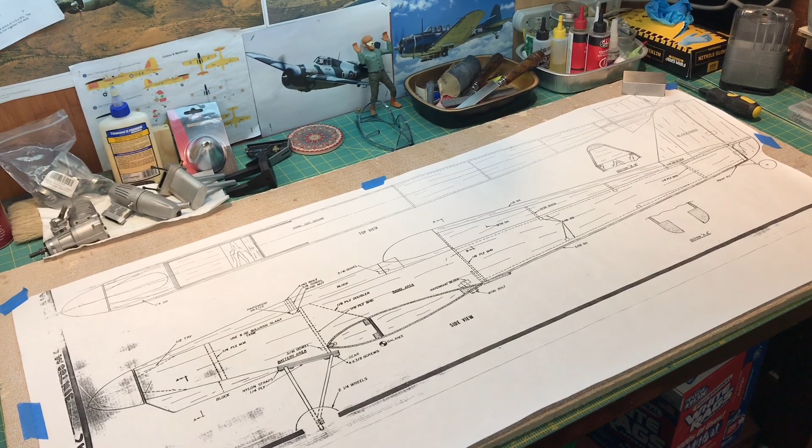So as you can see here, I have the plans laid out for the fuselage, and that's going to be the next major step of this build. If you've been watching my channel, you'll know I've spent a lot of time building the wing to this point, and there's a lot of videos on that. So it's nice to move on to another part of the plane. After a while building a certain part, I find it refreshing to move on to something new. So I'm really looking forward to starting the fuselage, and that's what I'm going to start doing today.

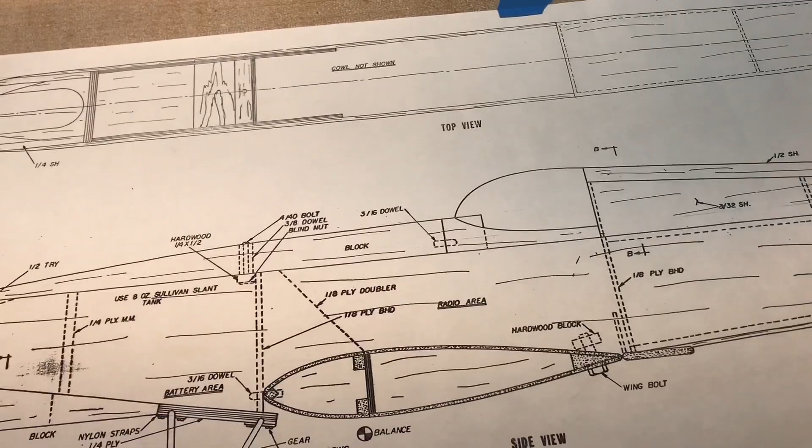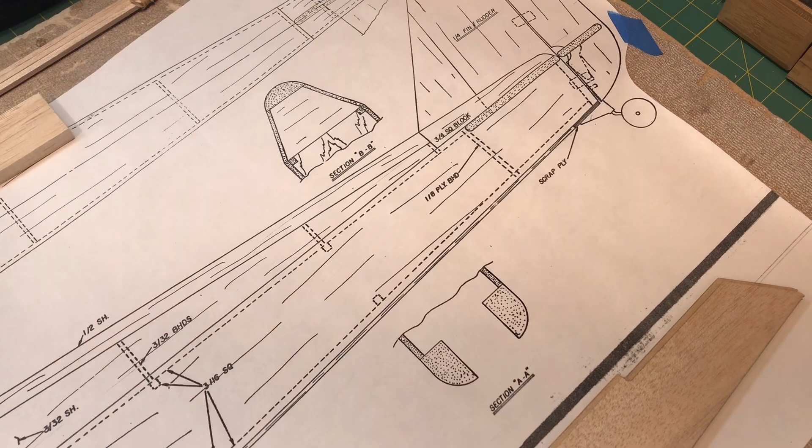Alright, so let's go ahead and talk about some of the design features or construction features of the fuselage. To start with, the sides of the fuselage are going to be a very long plank of balsa that goes along the entire length of the fuselage, and it's going to form sort of a box structure.

And here it is looking down on top of it. Not too exciting. Obviously it tapers down as it gets toward the tail section. And then the front section, there's going to be these plywood doublers to help strengthen up this area of the fuselage. That's shown right here on the plans.

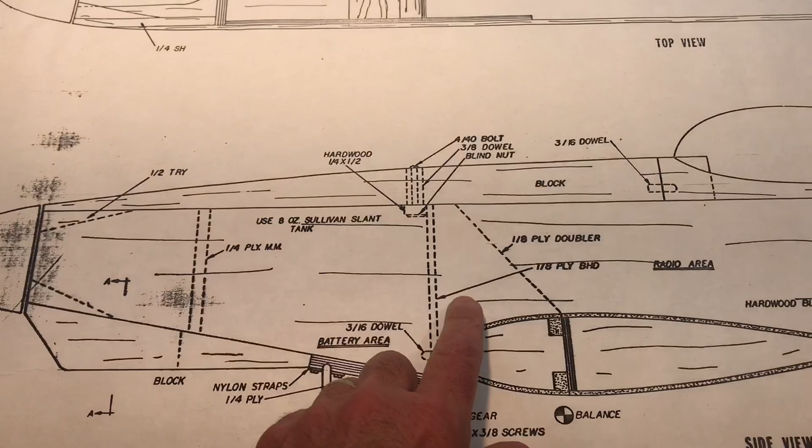So here's this piece here is going to set on here like this. And then the doubler is going to go right there, on top. This is kind of typical construction.

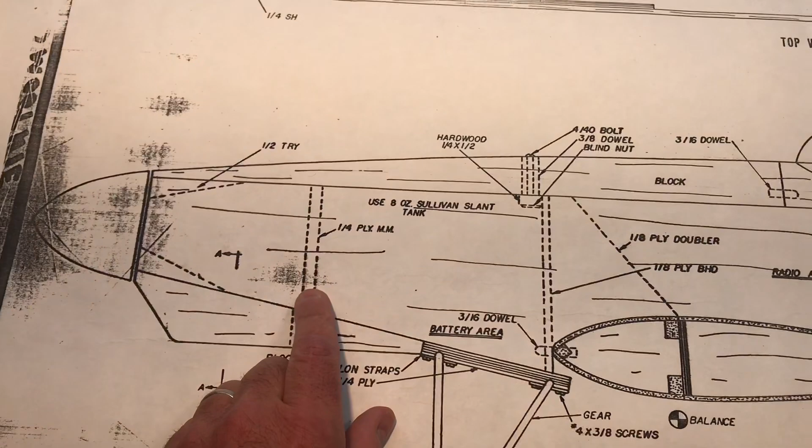And then there's going to be a series of these bulkheads. There's going to be the firewall, which is a quarter inch piece of plywood. What do I do with that? Here it is, there is the firewall.

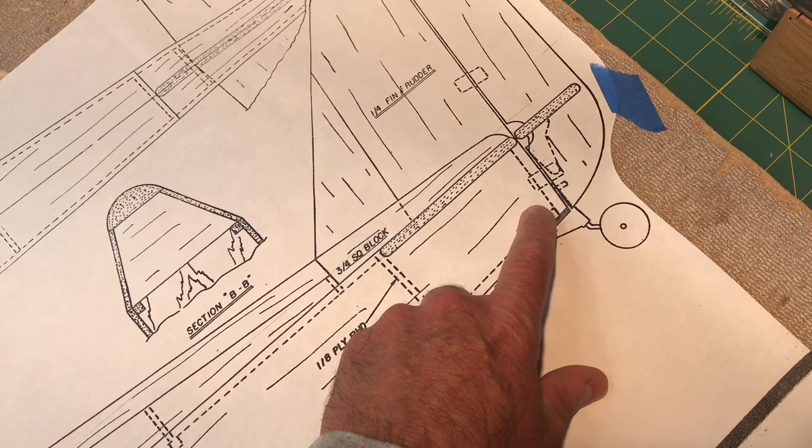And then there's going to be a series of these bulkheads that go in - there's going to be one here, one over here, one back here. And then in the tail section, there's just going to be a small piece, probably like a piece of square stock, to kind of bring it all together in the tail.

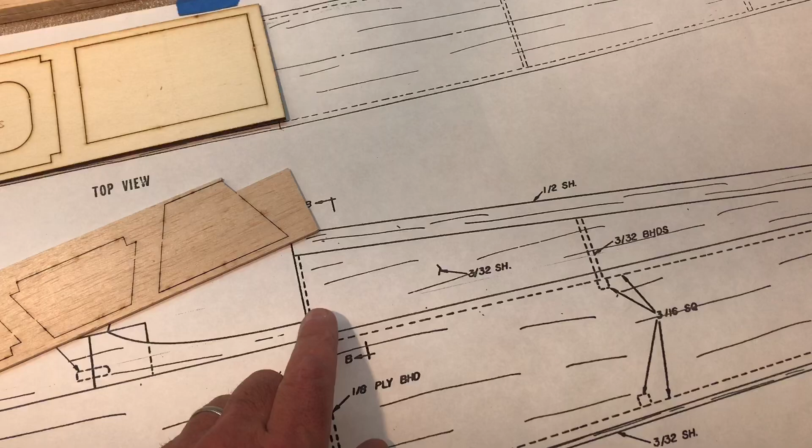And then up on top, there's going to be this turtle deck structure. Here's a cross section of that. And that's basically going to be formed by these smaller profiles - they're not really bulkheads, but they're just sort of placed right here, here, here, and here toward the back. And then on top of that is going to be this piece of block balsa.

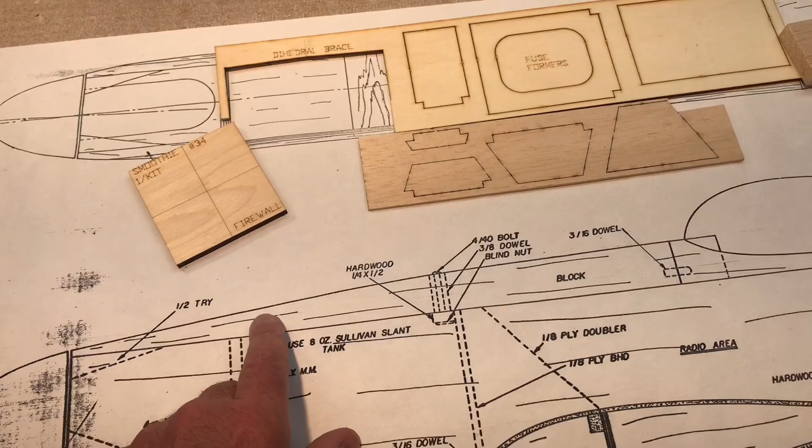So this is going to have to be shaped to this kind of shape you see here. Here's the piece of balsa up on top. In the front here, there's going to be a hatch formed out of this block of balsa, which will have to be shaped - this guy right here. And then it's going to tie into the area where the cockpit is, and that's this guy right here.

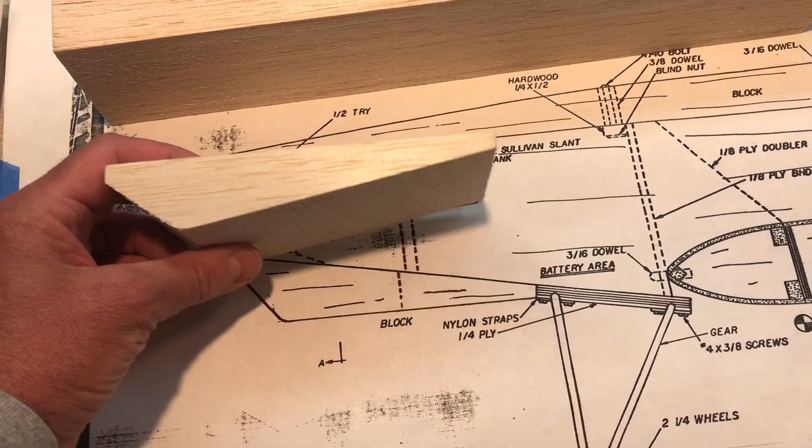So you can see there's going to be a lot of shaping and cutting like we did on the wing. And then on the bottom, the front here is going to be this piece, which is going to form this lower portion of the front of the fuselage, sort of like that cowl area.

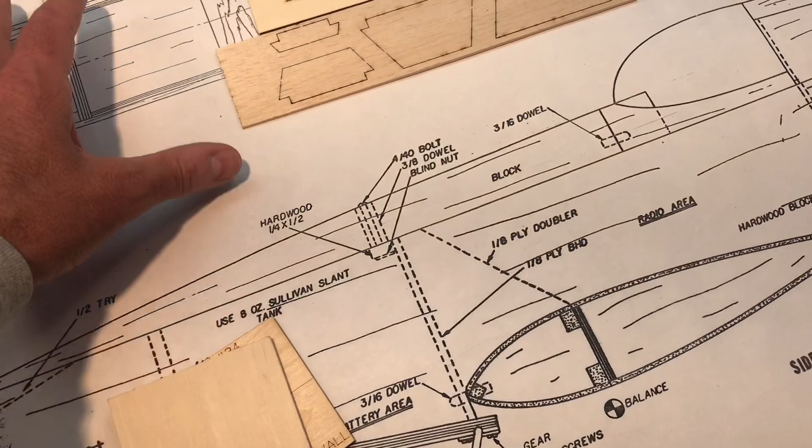All right, so let me get this stuff out of the way here. And here's the firewall, I'm going to come back to that. This section here is going to be where the landing gear ties into. This is the piece of landing gear stock, which is a piece of plywood, is going to go right there.

And then looking down on sort of up in the front area of the airplane, there's going to be another more doublers. And then there's going to be some triangular stock to kind of bring this all together, because this is going to have to get shaped and brought down. So it has to be built up so that you can do that.

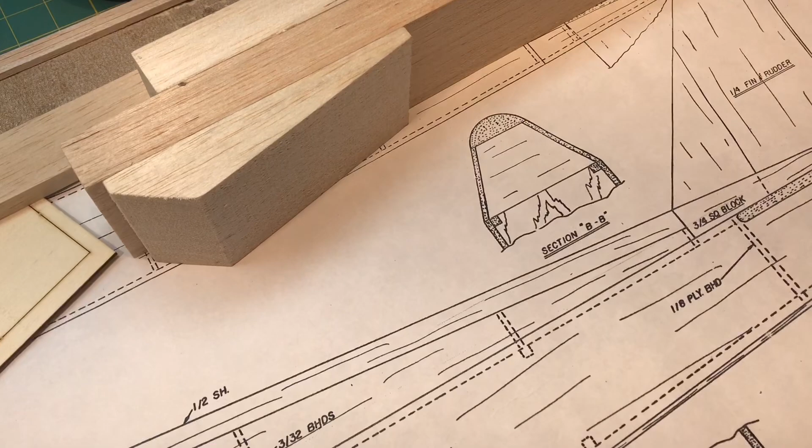All right, again, so here's the cross section through sort of this turtle deck area behind the canopy. And here's the cross section of the front lower section in the front portion of the airplane. And the reason this is open is because, I think, just to make room for the engine - and we'll talk about that in a second.

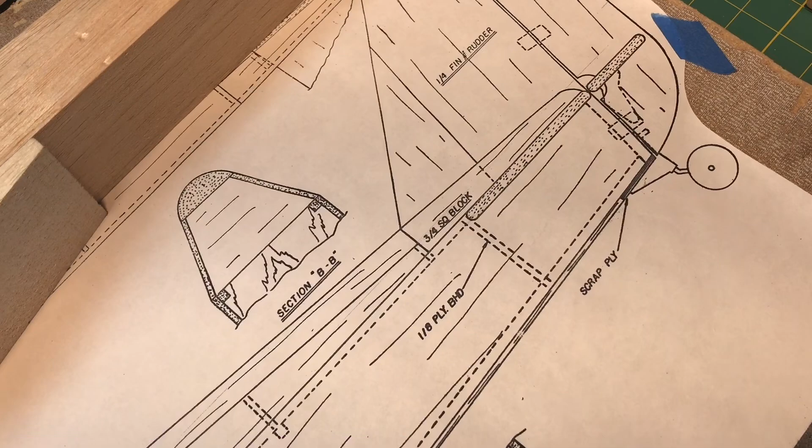And I think that's kind of basically it for the basic pieces and structure. There are going to be some cross members that go - these are like, what are these, 3/16 inch square cross pieces.

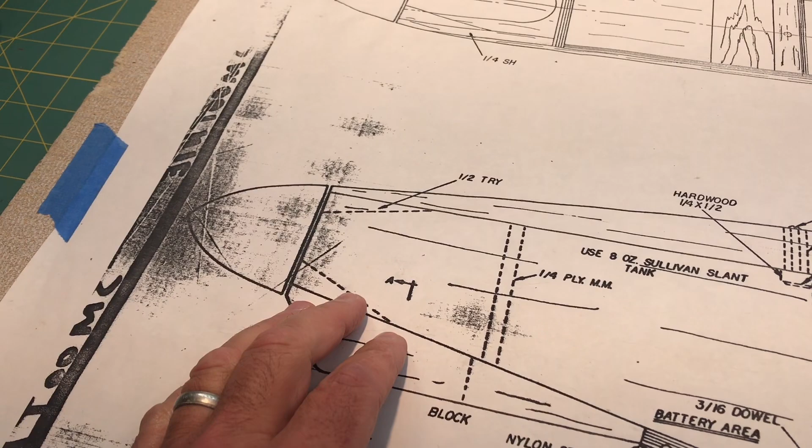All right, so one thing I want to look at is this firewall location. In the instructions, they tell you that the firewall is located here and it's up against the doubler. Let me pull one of the doublers out of here if I can pop it out.

Right, hold on a second. Let me pop that out with an X-Acto blade. All right, I'm holding my camera so I can only have one hand, so I got to do that off camera. So here's the plywood doubler.

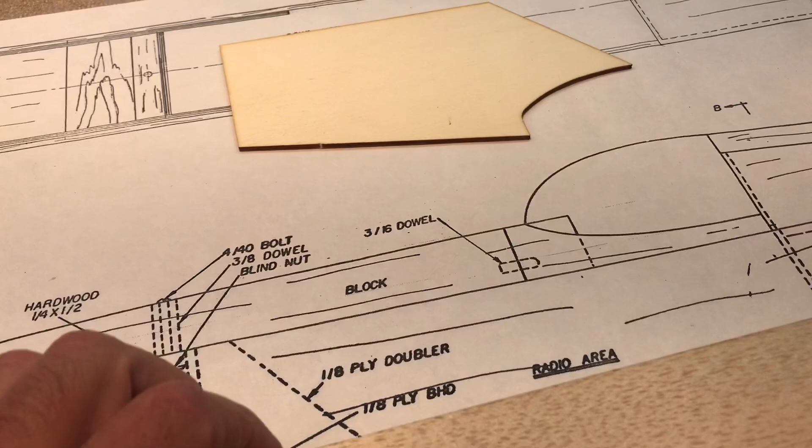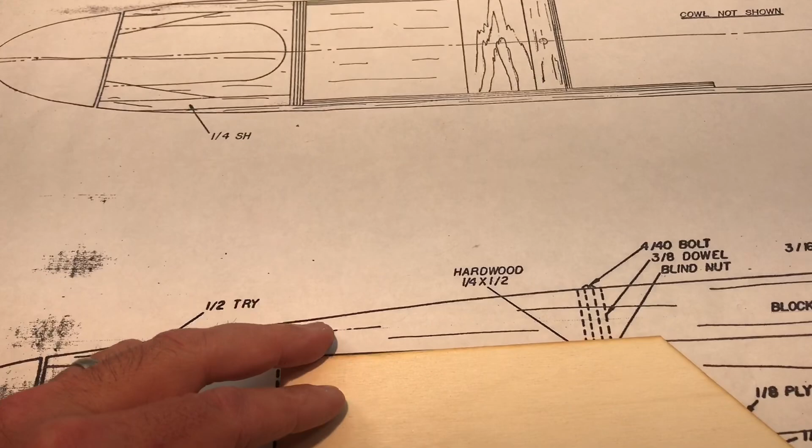So this piece of balsa is going to go down on here like this, and then the plywood doubler is going to go like that right there. Now let me move this out of the way and bring our doubler back up on here. So the doubler is going to go again like right here, just right about there.

And what you'll notice is that the firewall is basically right here. So the doubler kind of butts up against the firewall, or vice versa. The firewall butts up against the doubler like that.

So the thing is, the location of the firewall may change depending on your engine size, and this is in the instructions. Basically, based on your engine size, you may have to move the firewall forward or back a little bit so that it fits in the right location relative to the spinner and to the end of this cowl section right here.

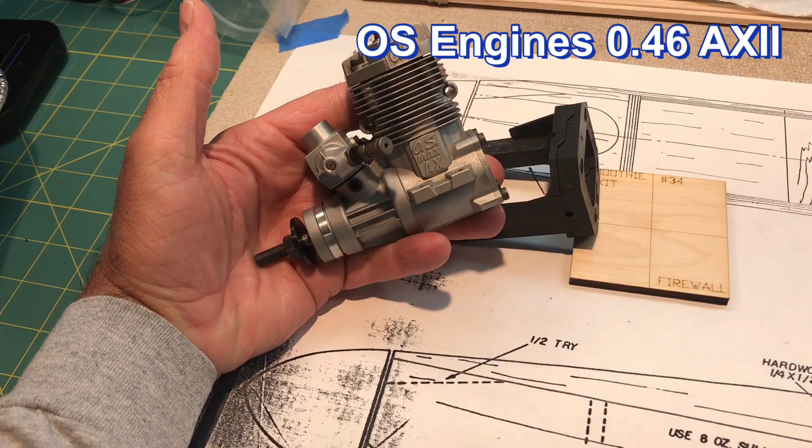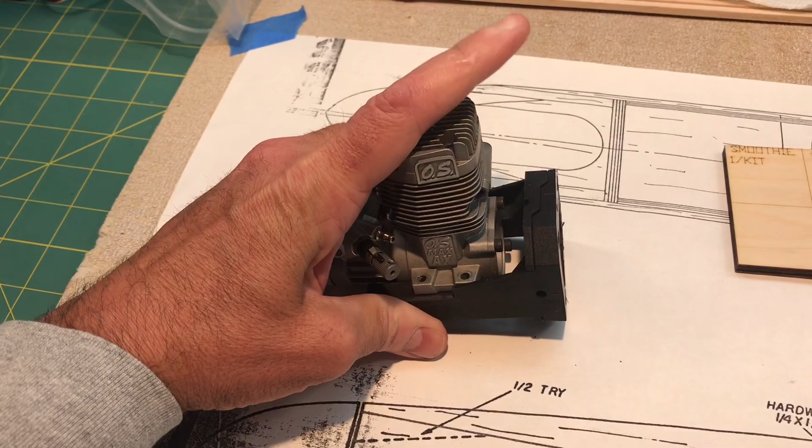All right, so let me grab my engine. I'm going to be using this OS Max 46 AX2, and I have this engine mount for it, which is going to be right about here, and it's going to be mounted probably somewhere in the middle of the engine mount so that I have some room for the hose or the fuel lines to come through if I need to bring them through the middle, and I need some space also for the mounting bolts for the engine mount itself.

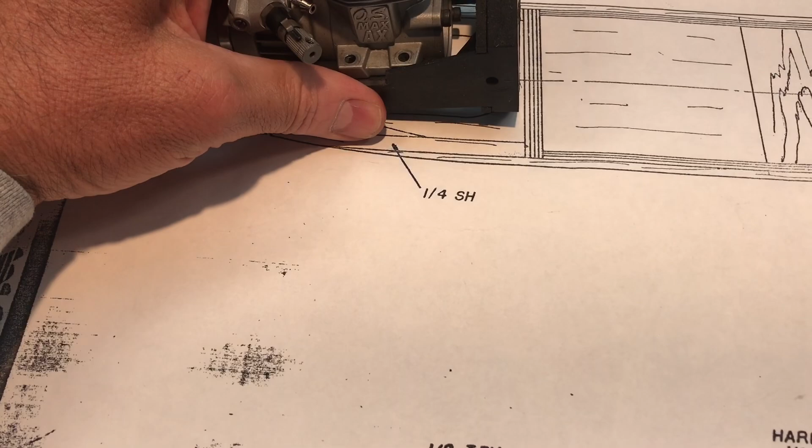So if I put this down sort of where the firewall is going to be located, let me do it on this one up here. Per the plans, it would be right about here somewhere. And what you'll see is that the engine sticks out really far, like almost an inch or so from the front.

What I have to do, obviously, is move the firewall back a little bit. So usually you want sort of like the back plate of the spinner or the front portion of this part of the engine probably sticking out about 1/8 of an inch or so, 3/16, 1/8 of an inch gap between the front of the cowl and then the back of the spinner.

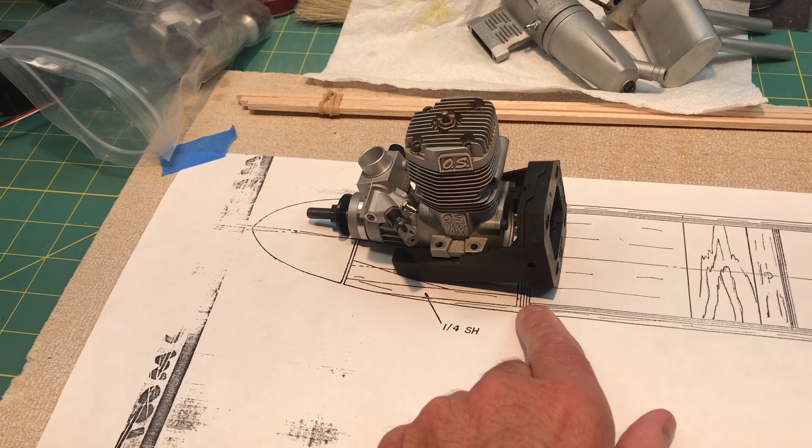So in order to do that, I'll have to put the engine back somewhere right about there, and I'll have to relocate the firewall back a little bit. Again, this is in the instructions, so it's nothing special.

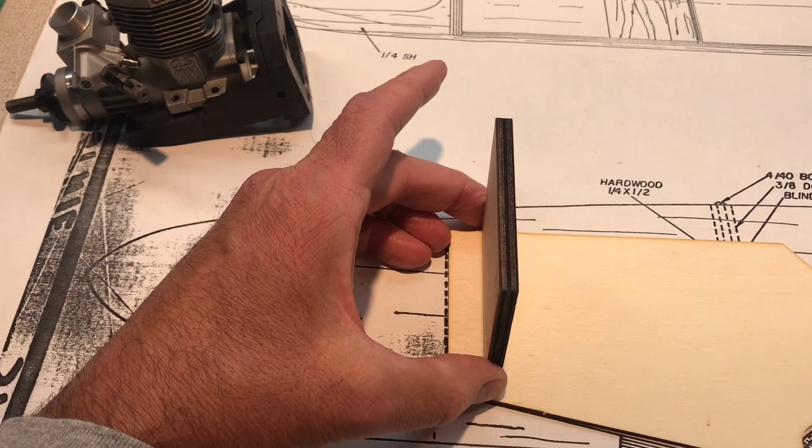So what's going to have to happen is I'm going to have to trim this doubler back so that, obviously, the firewall will come back a little bit like this. So I'll have to trim the doubler back so it matches, and we'll measure all that out later, but that's basically the general idea.

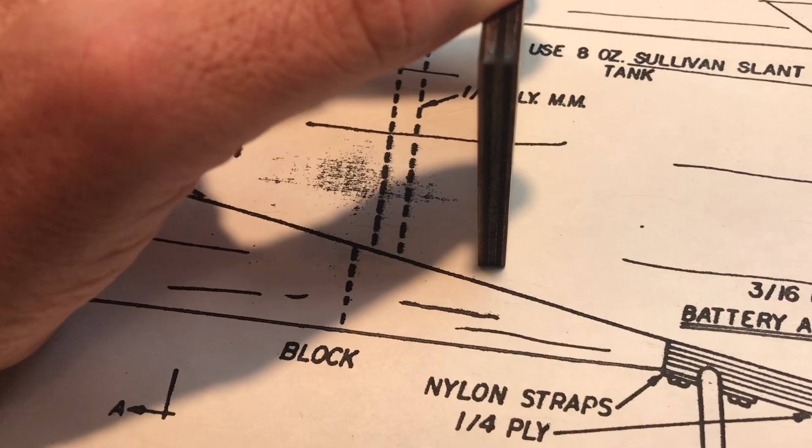All right, so a little bit of an issue is that if I put the firewall where it was supposed to go per the instructions, and I move it back about 1/2 inch or so, right about there, you'll see that there's going to be a gap between the bottom of the firewall and the bottom of the fuselage.

So the way I'm going to deal with that, which makes sense, is I'm going to go ahead and cut another firewall out. And I have this piece of plywood. This is birch plywood, which is the same 1/4 inch thickness. So I'll end up just cutting a piece a little bit longer so I can get the proper size for the firewall.

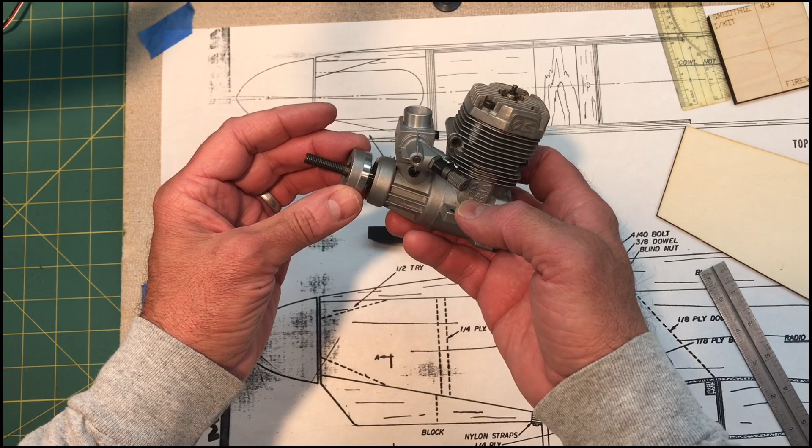All right, so I'm going to go ahead and make the measurements now for the location of the engine mount. And I took off the retaining nut, the prop nut, and the washer so that I have the end of the engine here kind of exposed.

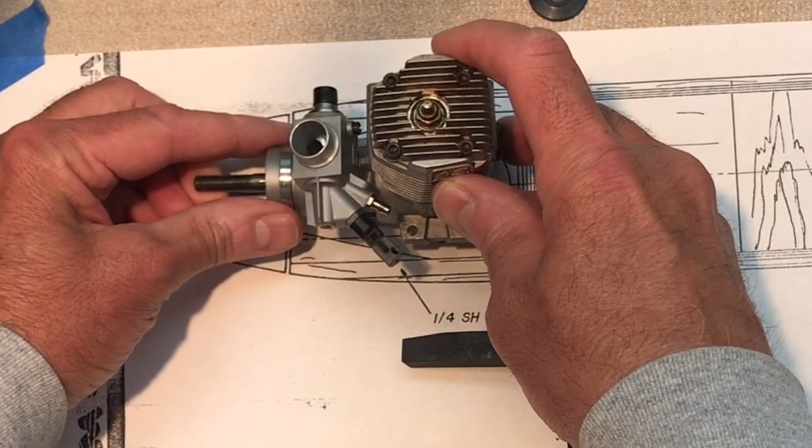So the engine is going to go somewhere about right there. Now I haven't decided if I'm going to mount the engine sideways or inverted. I'm probably going to go inverted with the engine. It doesn't really matter at this point how I do it, because the location of the engine is going to be the same no matter what orientation it is.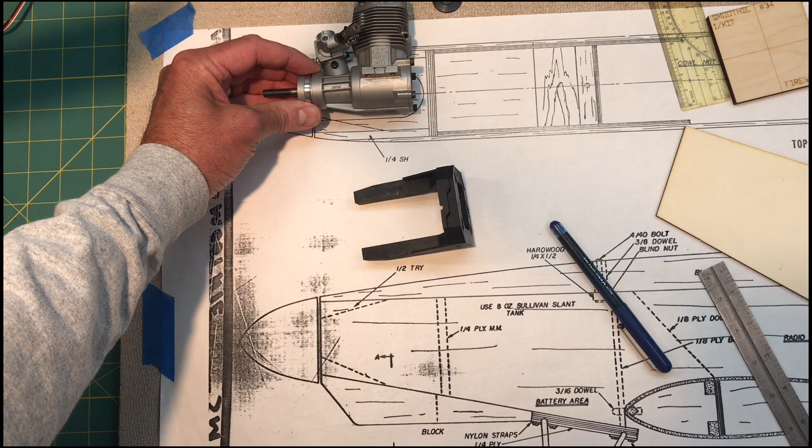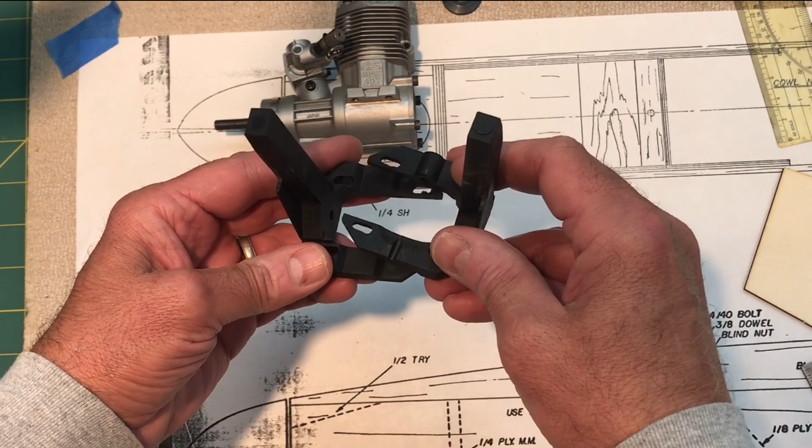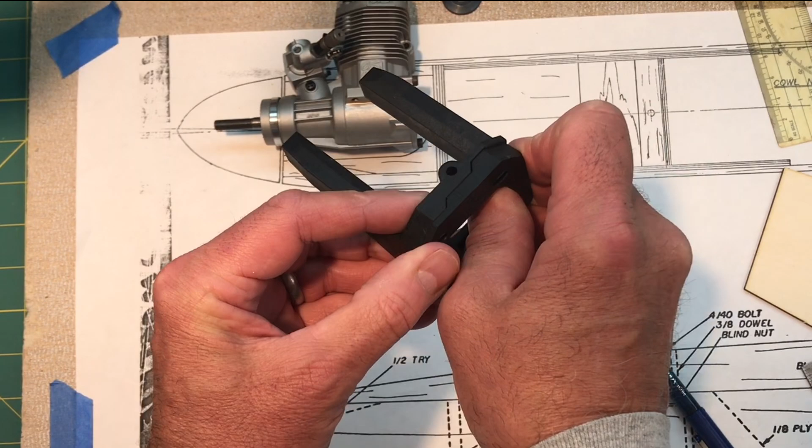So this is going to go about somewhere like right about here. Okay, this is a Great Plains engine mount. It actually comes in 2 pieces, and they slide together, making an adjustment because it goes from a 40 to a 60 size engine, so it can come out pretty wide, but it fits together nicely.

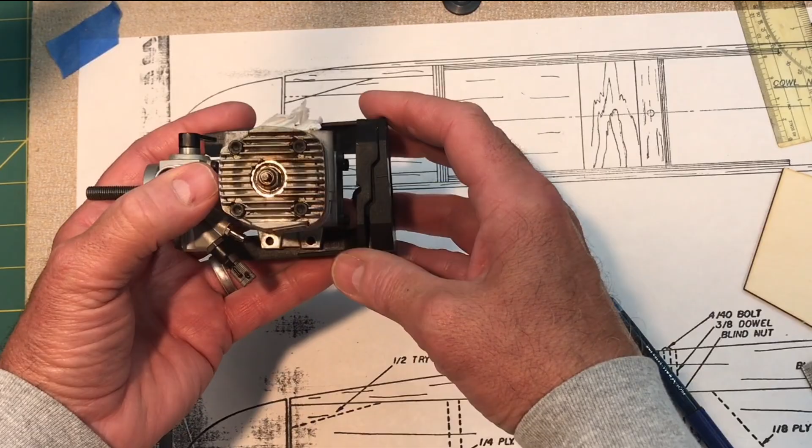Let me get this engine on here like this. So it'll be somewhere like that. I'm going to put the engine about midway on this mounting rail. There's an angle here that gets in the way, so I can't push it all the way back.

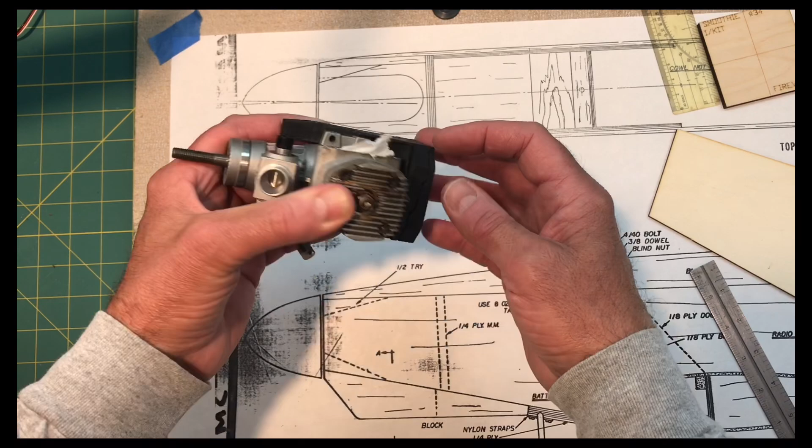Plus I don't want it all the way back anyhow because I need to make room for the mounting bolts, and also for the fuel lines, the throttle hookup will probably come right over here. So I'm going to put it right here in the middle, and use that as my baseline for my measurements. By being in the middle like this, I can make final adjustments later if I have to bring it forward or back a little bit.

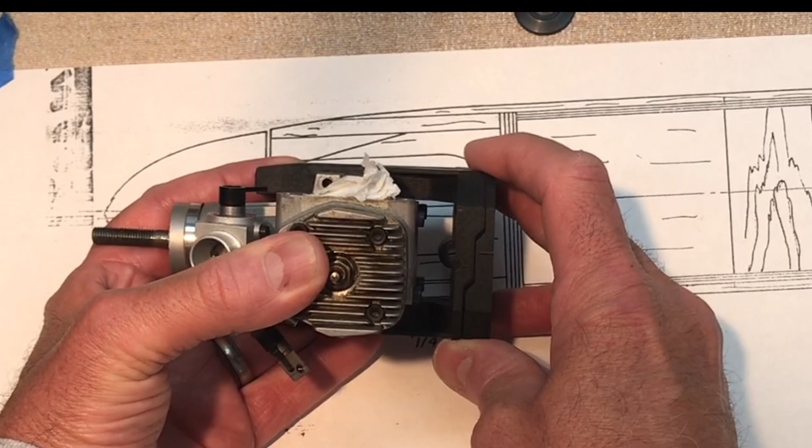I'm going to go ahead and start sort of in the middle, and I'm not going to measure it exactly, just somewhere like right about there. I'm going to try to push this a little bit forward here, and try to clamp this on here if I can get it to hold. I'm not sure if it will or not, or how well it will work.

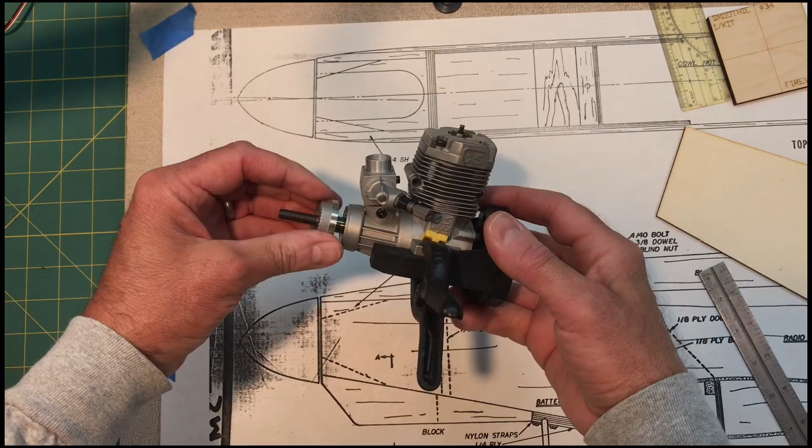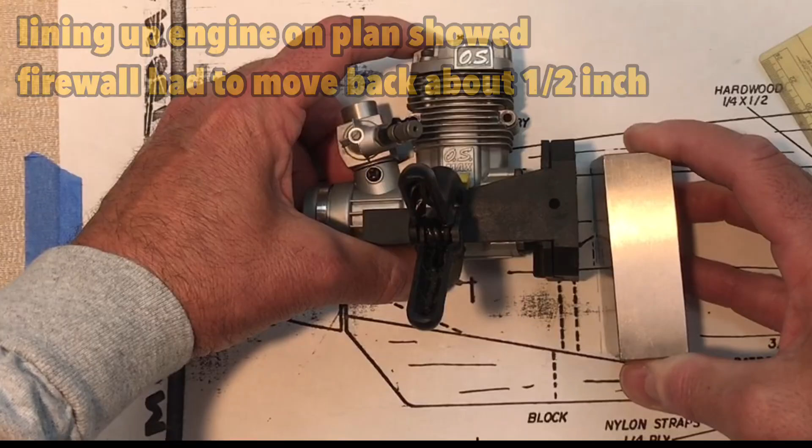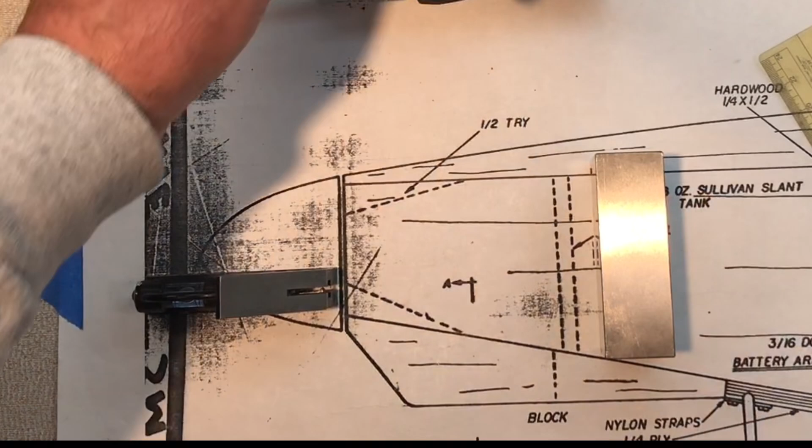All right, so there's my new firewall location. Pretend that's my firewall. Go right there. Looks pretty good. Let me grab this guy right here. All right, so that'll give me the room I need for the engine mount.

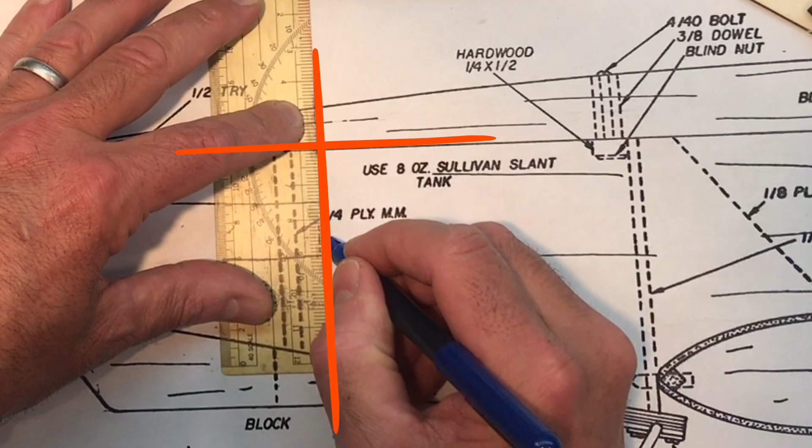All right, I'm going to check it with my protractor here, and I'm going to bring my line.

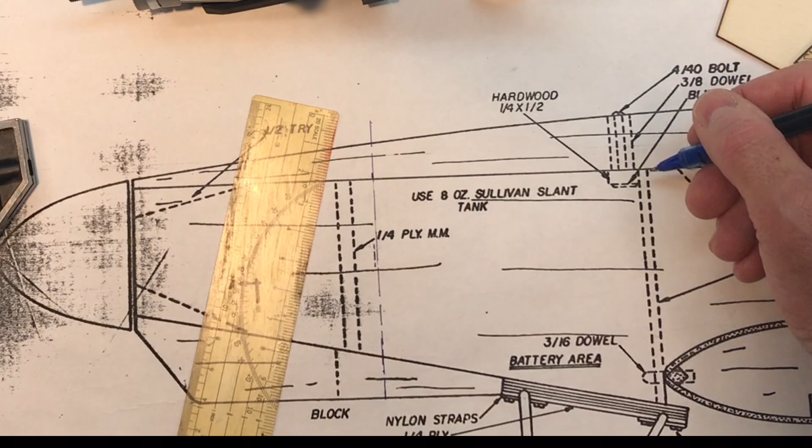The reason I went beyond here is because, as we'll see with the other bulkheads, I have to transfer these lines beyond the fuselage, because I'm going to mark those locations with the bulkheads on that large balsa plank. That'll be in an upcoming step.

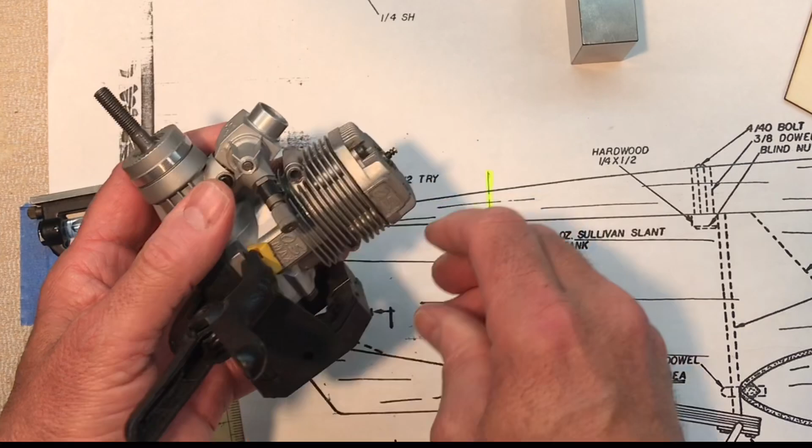Okay, well that's that. That was easy enough. Let me put these back on here. I don't want to lose these.

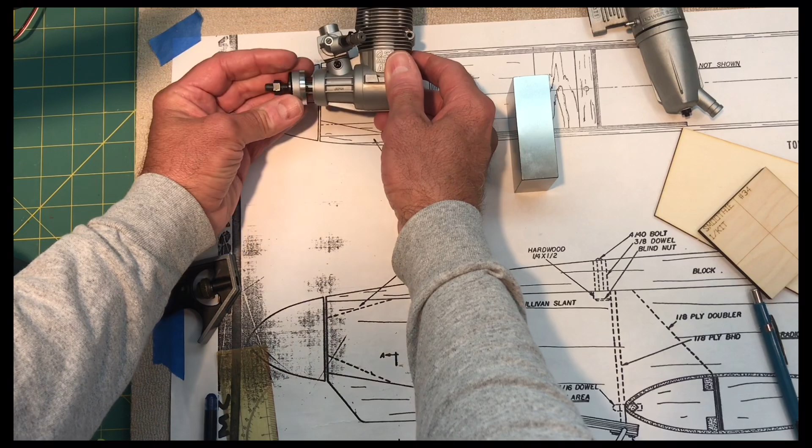Okay, as I mentioned, this is an OS Max 0.46 AXII. Looks like if I go upside down, like I mentioned, I'll be using this muffler out here like that. I was considering going sideways, if I went sideways, I could use the original muffler also, but I also had this Pitts muffler, which actually looks really cool, because then it would be sticking out of the bottom like that.

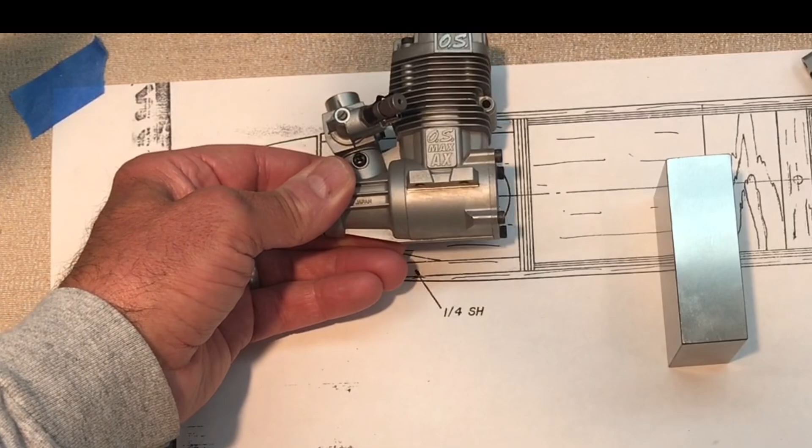So I just haven't decided yet. The problem with going sideways is that the head of the engine is going to stick about that far out of the side of the plane, and I don't know if I want to see that. So I still have to decide, but that's one way or the other. I am leaning toward mounting it upside down, or inverted.

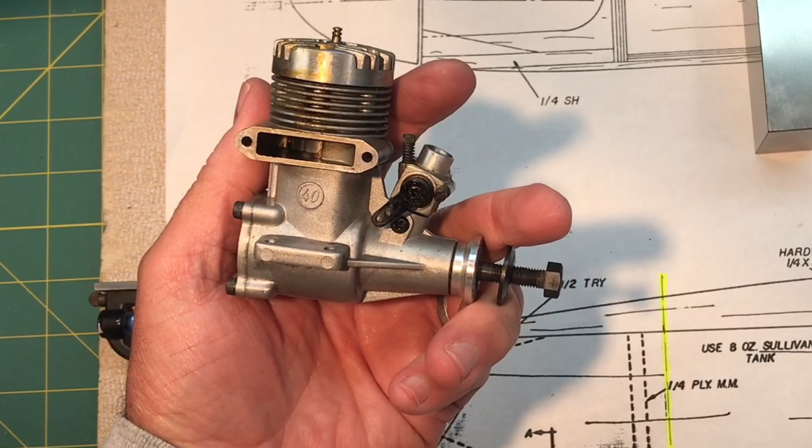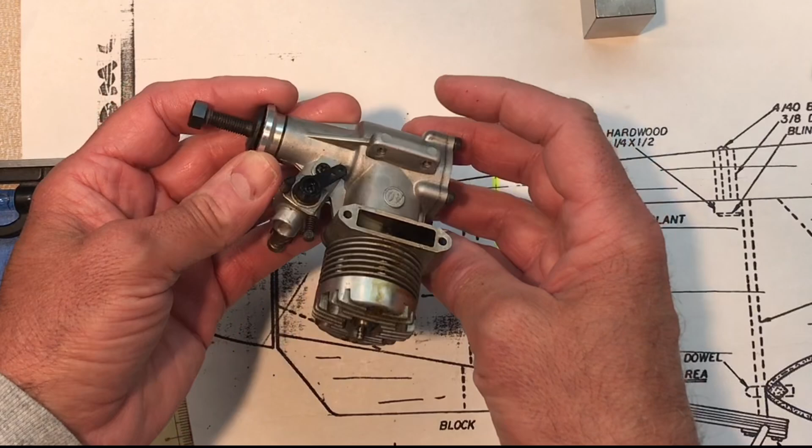All right, the other thing I have is just for show, this old OS FP 40. Now this plane, the lower end of the engine would be a 40 class, like this guy right here. You can see that if I used this old FP on here, I would have probably plenty of room without having to modify the firewall. But I think this engine is not very powerful. I mean it's a good engine, it's an FP engine, it's nice, but I think I need something a little beefier for this plane.

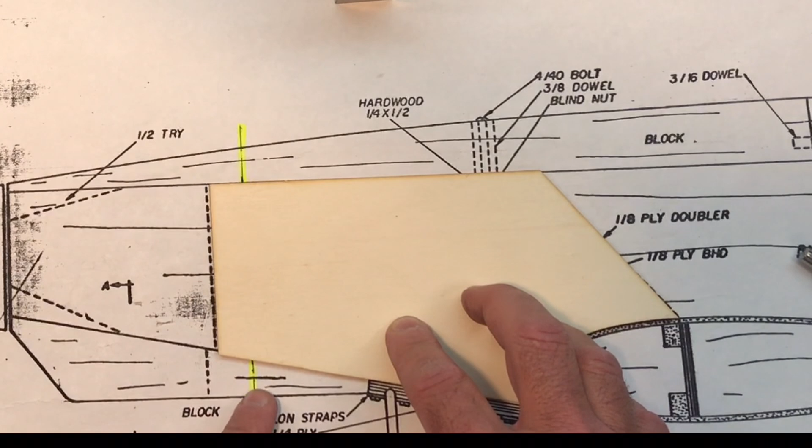Okay, so I'm not there yet, but eventually this doubler, and the plywood plank that goes along the side will be right here, and I'll have to transfer this line onto here so I can cut this to make room for the firewall that's going to be moved back.

All right, the other thing I have is the spinner that I got for this thing. Oh, that's pretty nice. Huh, there's no... that's not good. Didn't come with a little nut. Oh well, I think I have one of those.

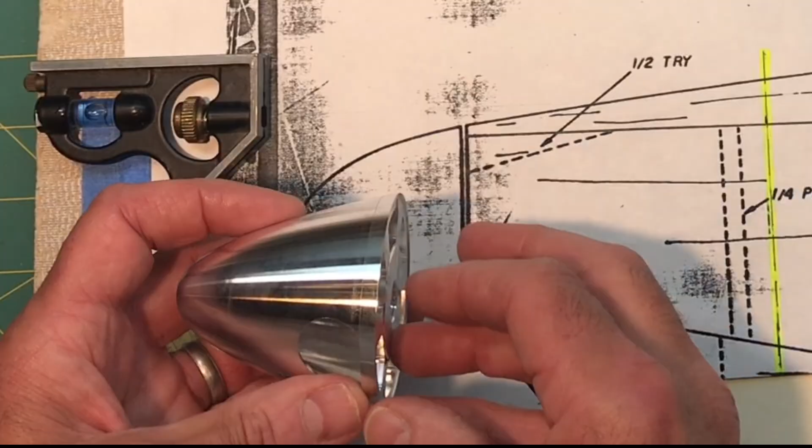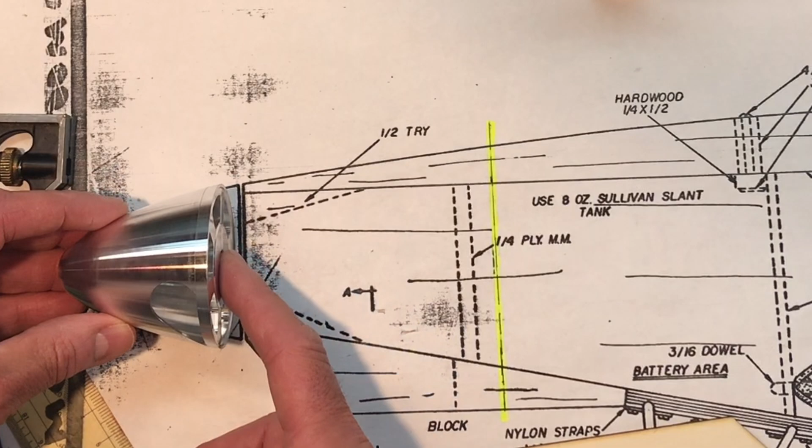That's going to go right here, like that. So what's going to happen as you construct this, once you get all these blocks on the front of the fuselage, I'm going to have to mount the engine and then mount it with the spinner so that I can make these transitions and carve this block down to match the spinner geometry. But that's a little ways off. Anyhow, that's really nice.

Right, now that I have the firewall located, I have to extend, as I mentioned, these bulkhead lines out beyond the fuselage side so I can mark them carefully.

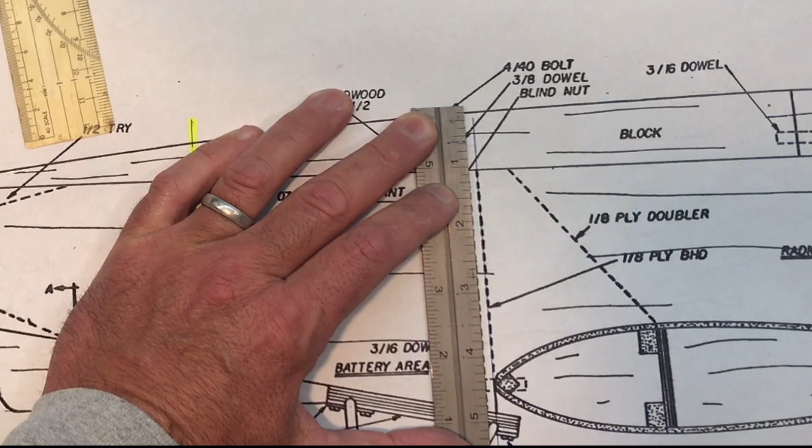There you are. Okay, all right, and I'll do the same for these two last ones. This one.

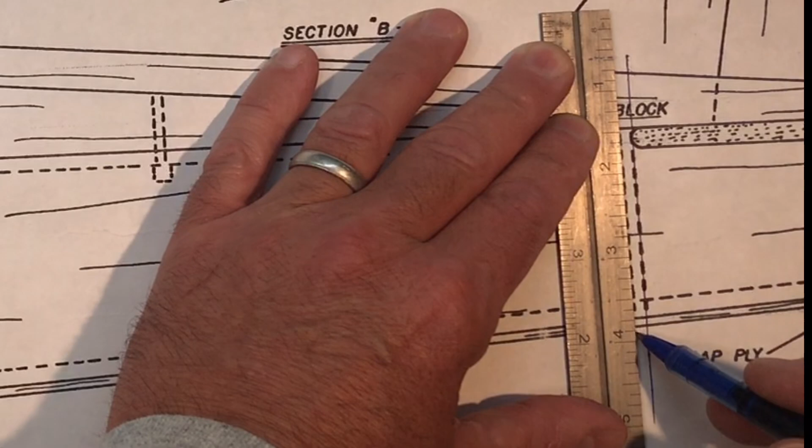Now what I have to do is put these balsa planks down over the plan. I'm going to put them on top of each other because I need to mark them both in the same spot, so I carefully want to make sure I get them lined up against each other in the right location, somewhere like that.

Actually, I'm going to start by taping them together. I'm going to get them close.

Really, probably the most important spot is going to be right here where the wing's going to go, and make sure that's lined up, because the edges I can trim if I had to, but these look pretty good right there.

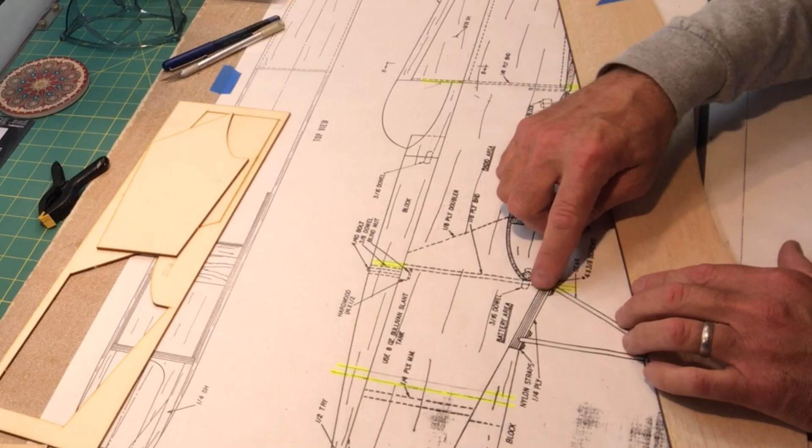One thing the instructions tell you is that the plans may be a little stretched or a little bit off, probably due to printing, so you have to be a little careful. I think what I'm going to do is make sure the wing root here is in the right location, because this is going to be a control point with this bulkhead here, and then with this one back in here. Then I can always trim off the edges or the ends if I need to, but I don't want to mess with the wing root area.

So this is going to go right about there. It may be hard to see, but this actually sticks over about a quarter of an inch on the front here. And then the back piece is actually angled weird, it kind of goes off on a triangle, or like an angle like this. But the back of this is actually going like this, the tail section is actually like that.

So they do mention you have to do some trimming. Obviously this kit has changed over the years a little bit, and the pieces you're getting in the box, I've found, don't always exactly match the pieces on the plan or in the instructions. So there are a few little minor things. None of it's a big deal, but if you're not prepared for that, it may confuse you a little bit. So anyhow, just take your time.

Okay, what I'm going to do now is pin this down onto the building board. Now I don't have my wax paper down here yet, I'll do that later. I'm going to get this done because it's going to be easier to see the lines through here and such. So I'll go ahead and do that after I get this marked out, and lay my wax paper down to protect the plans, but for now I'm going to leave it off.

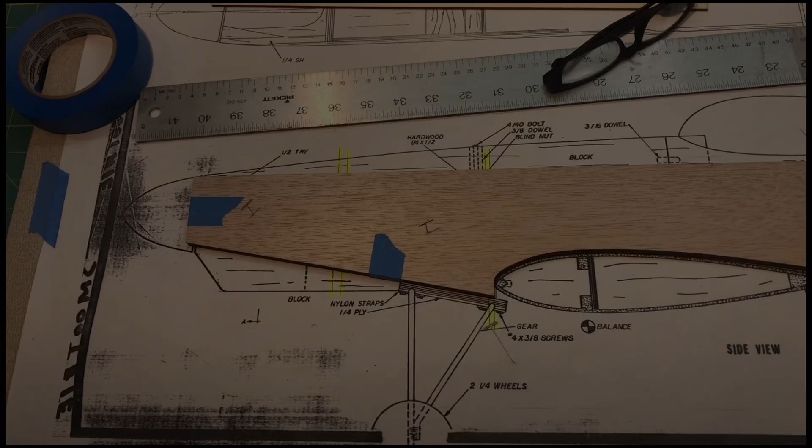It's kind of hard to see with the other camera angle, but I got these wood planks lined up as close as I could, and here's some of these bulkhead markings. I actually marked the tail section also, you can kind of see here, obviously this is going to get chopped off, not sure why it's like that anyhow. And then here's another bulkhead, here's another bulkhead, here's the firewall, and the front's going to get trimmed a little bit too, but that's okay.

So these two sheets are lined up nicely against each other, and now I can go ahead and transfer these lines onto the planks, and that's where the bulkheads will be glued to, or lined up to glue.

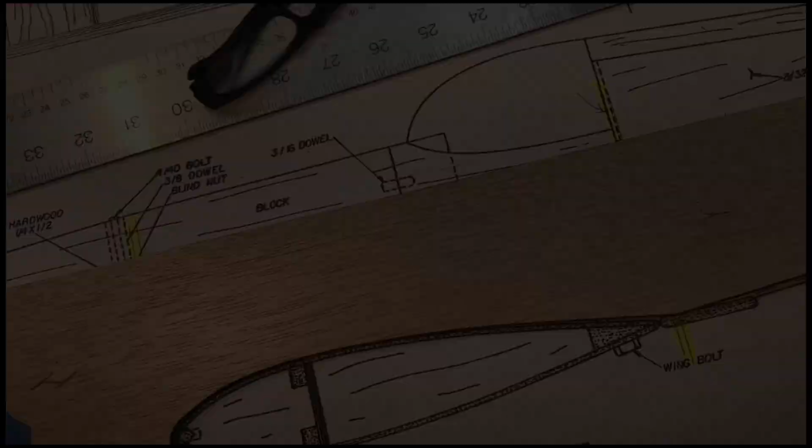Now I can go ahead and mark these lines, and I'll mark them on the edges of this sheeting. It's kind of dark because of the laser, I probably could have sanded that down a little to make it lighter, but I don't want to mess with it. So I'm just going to take my time and use the square here, go right up against that edge, and then mark it right like that. I can see that. Okay, I'll do this one here.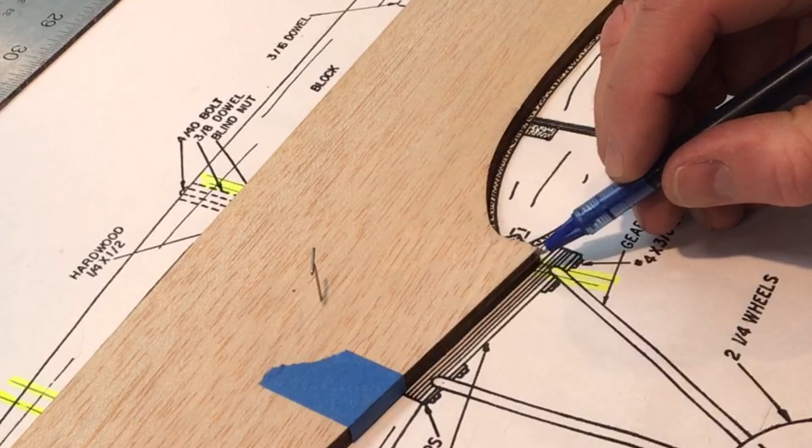Okay, so I did this side too, so it's going to be hard to see because this is dark in here anyhow, and it's kind of small, kind of far away, but now all I got to do is have the marks kind of just right on top here on the edge, and I'll draw this first one on here. Just kind of connect the dots right about there.

And I'll have to do the same thing to the bottom piece once I remove it, but right now I'll do this like this on here. Okay, so that'll be the location of the firewall. It's gonna go like right here. And of course I'll have to get a bigger piece, but it'll be just like that. Okay, so I'm going to do that for all these, and we'll come back.

All right, so I marked each one of these. This guy back here, and let me get over here and take a look at the back tail section. Yeah, so the tail section, you can kind of see it's going to be trimmed right off like that. There's a little piece of wood's going to go right in there.

So the next step is going to be to transfer the firewall, or basically to trim these doublers. Plywood doublers, have to mark those to where they're going to be trimmed. So I'm going to do the same exact thing. I'm going to take this doubler out of here. Should be using my cutting mat, but it's okay. Pop this out real quick. I'm going to move this pin out of here.

All right, so let me get these lined up. Let me tape these together like I did with the other one. What's funny is I was looking at the instructions and, you know, kind of looking at how to put these lines on here and stuff, and I was thinking that's going to be pretty easy. It's pretty simple to do, and it actually is. It just takes a lot longer than I thought it would.

Okay, so I got these doublers taped together. And this guy's going to go right on here, and I'm going to use the wing root as my basis, and get this lined up on here. All right, so I'm not really going to be able to pin this down because it's plywood, but I'll line it up like this. I'll put some weights on this.

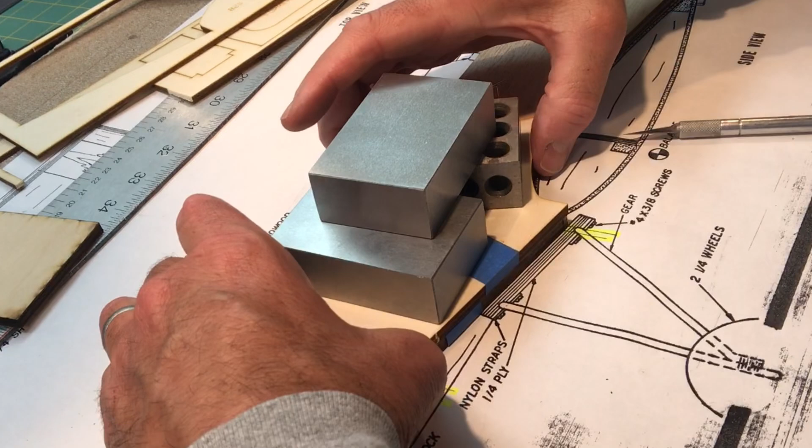So the nice thing about this is that you're working with wood, and you've always got some room for adjustments. So I'll go ahead and draw the back. It's not that important because it can only go one place. It can only line up like that.

All right, my camera had a little bit of a glitch in it, so I already marked this, but I'll just go ahead and show it really again real quick here. I just marked right here. And I don't need to mark the entire firewall because I'm just going to be cutting it off along the back line. So that's this line right here. And then I already marked the front or the top of it also.

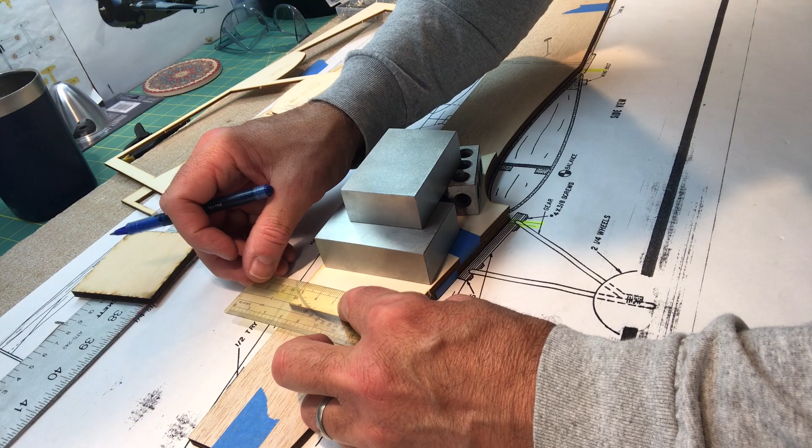I thought I was recording, but I wasn't. All right, so I'm going to carefully draw the location where I'm going to cut the doubler back. Use my hand.

Okay, so that'll be transferred to this side. I can just do this. And actually I only need to mark one side because I'm going to keep these taped together when I cut it, so the cut's in the same location, but I'll just do it for fun.

Okay, well there we go. So if we did this right, let's pretend, let's put this here. And let me grab my engine.

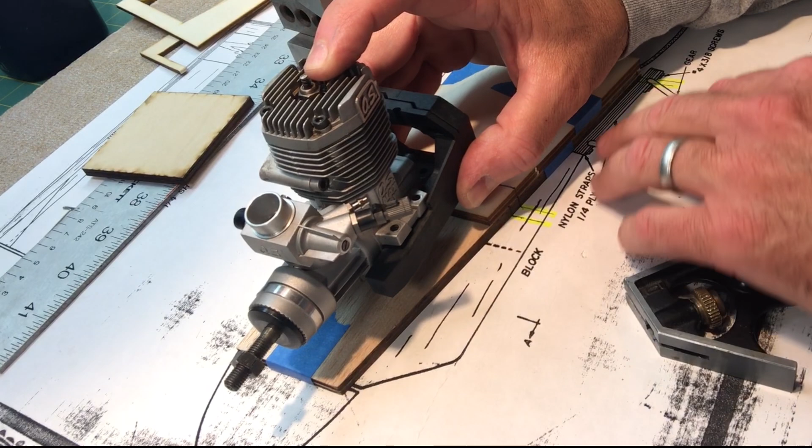Okay, so this looks like it's pretty good. I'm just kind of eyeballing it to kind of see where it is, but yeah, I'm going to be trimming off this part here, and then it's kind of hard to see on the camera, but it'll be sticking out about 1/8 of it. I mean, I can adjust this either way anyhow, so it's cool. It's going to work just fine.

All right, so that's going to be about it for this video. It took a little bit longer than I thought to transfer all these lines and to get the firewall located in the right location and all that. So yeah, next video, I'll start building the fuselage up, putting the bulkheads on, putting the firewall, putting the doublers on, and moving forward with the fuselage build. So until then, thanks for watching my channel. I appreciate it, and we'll see you next time.